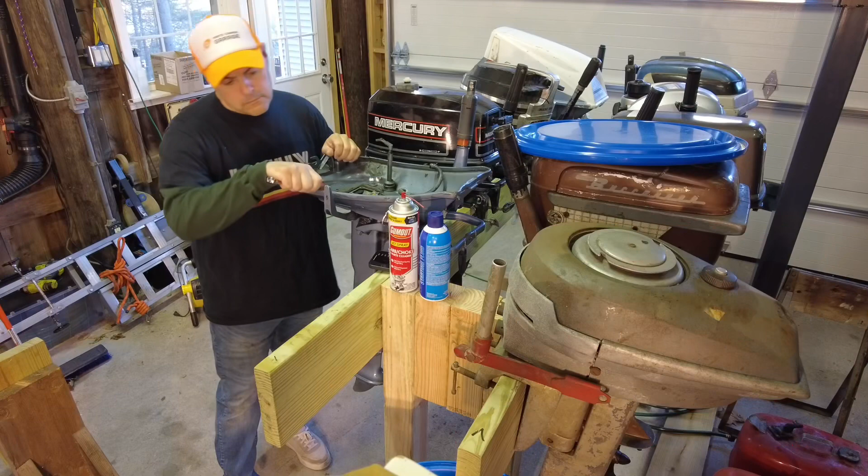What the heck could this be? Hello, Parts Cannon Garage. You're on speakerphone because I have a wrench in my hand. Yes, yes. This is Claude Berkshire Huffingtonson the Third. Okay there. Hi, Claude. Yes, yes. Let's dispense with the pleasantries, shall we? My son, Charles Benedict, told me you were selling a Longshaft outboard motor. Is that true? Not really. I'm just some dude in a barn. Not a real business. How did your son find out about this?

I rarely listen to the child, to be honest. Let's cut to the chase. This Longshaft you're selling would be perfect for the new sailing yacht. Well, I don't even know if it works yet, but it's sitting right next to me here. Hopefully if I get it running, I'll give you a call. How does 10,000 sound? $10,000? Perhaps it's running now? It's still not running, no. But no, oh, well, okay, Claude, for $10,000, I can have it ready by tomorrow. Splendid! Well, I must really get back to the yacht club. I say good day to you.

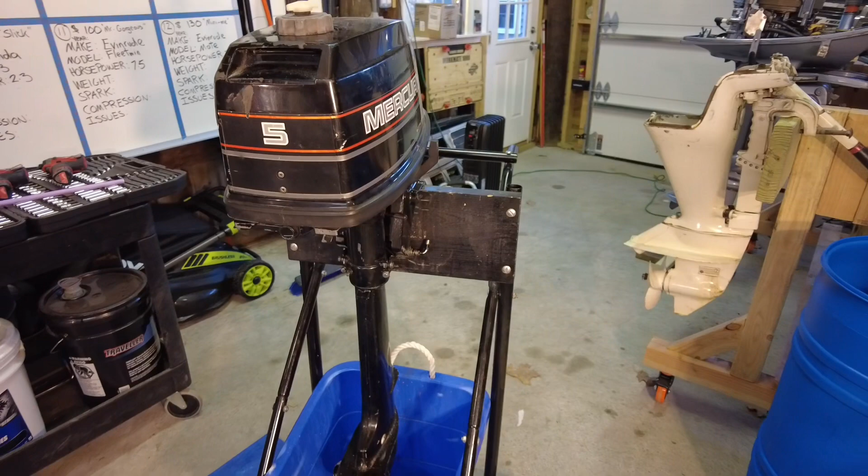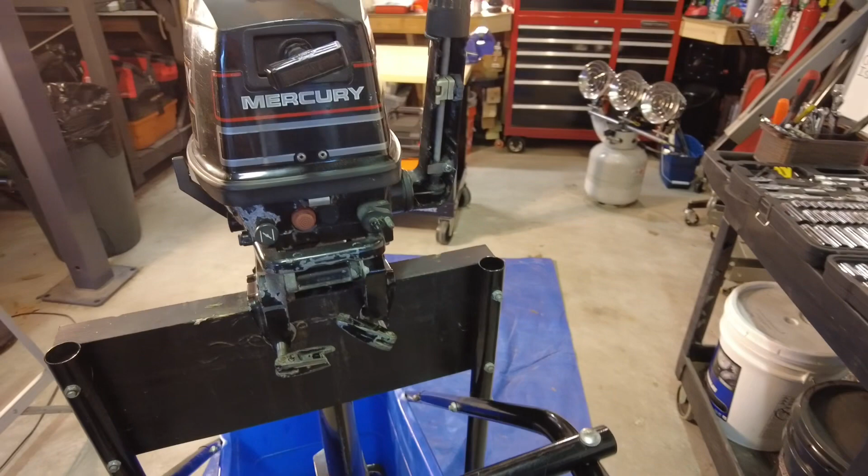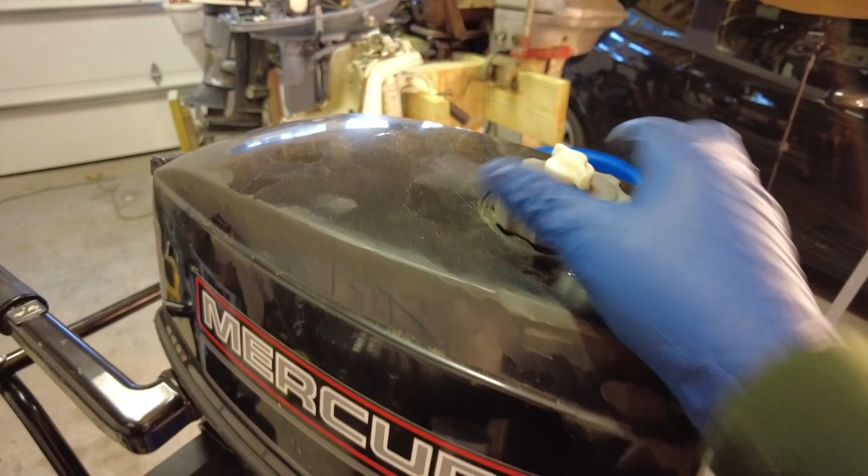And here we go on step 1 of our 8-step process. Step 1 is inspect. So we take a quick look around, see if there's anything broken or missing. Make some general comments on the condition possibly, or at least observations. Looks pretty good. I don't see anything missing. I think this is relatively new. Now in this one I do have one piece of information. I was told that for some reason the onboard gas tank, which is a great feature, does not work. It only will run, or it last ran 5 to 7 years ago, using the external tank only.

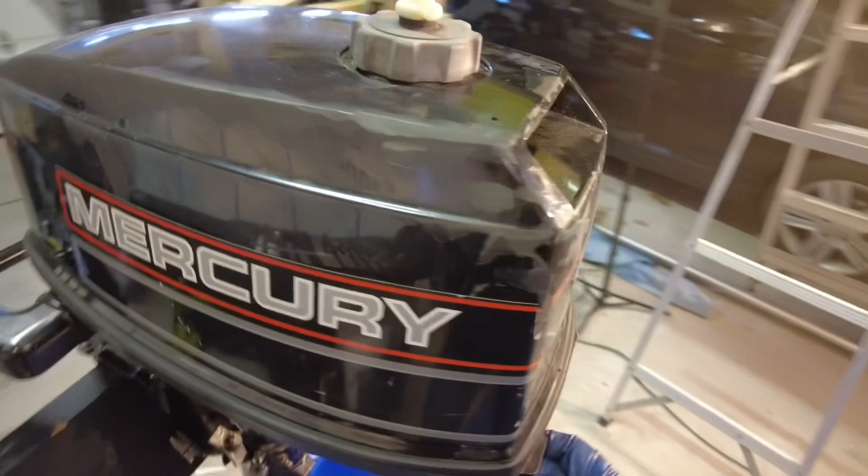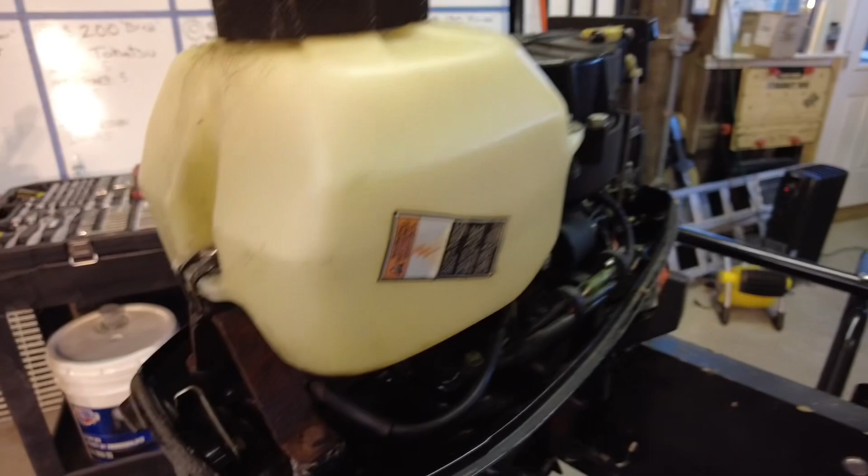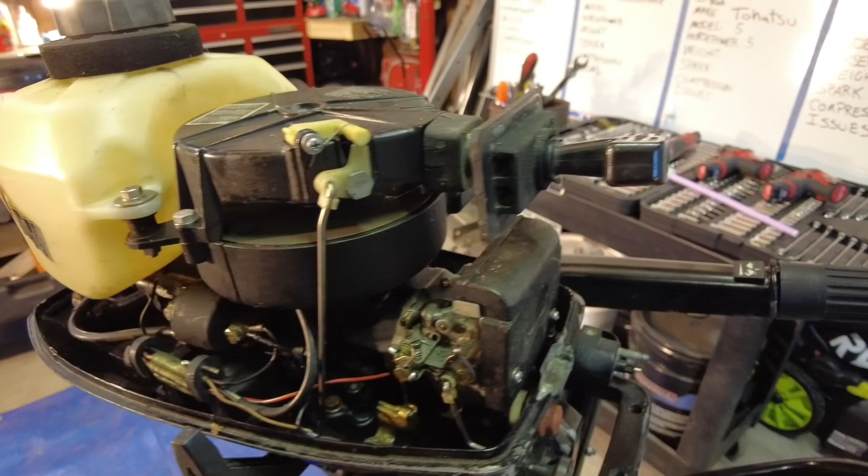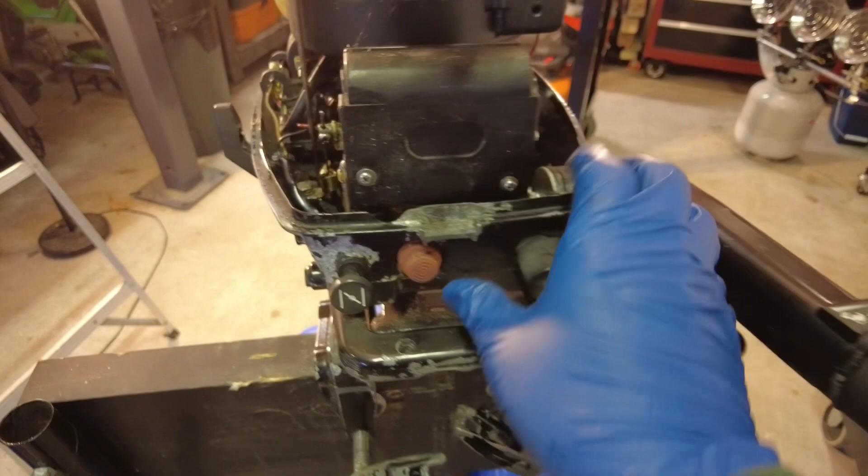So let's take the top off. Looks pretty good. Okay, there's the tank. Certainly looks different from the other outboards we opened. There's the plug. Oh, this is a single cylinder rather than the twins we've been working on. Something new. Pretty straightforward here. Here's your choke. Feels pretty smooth. Kill switch, which is like pressing on a rock. I don't know about that one.

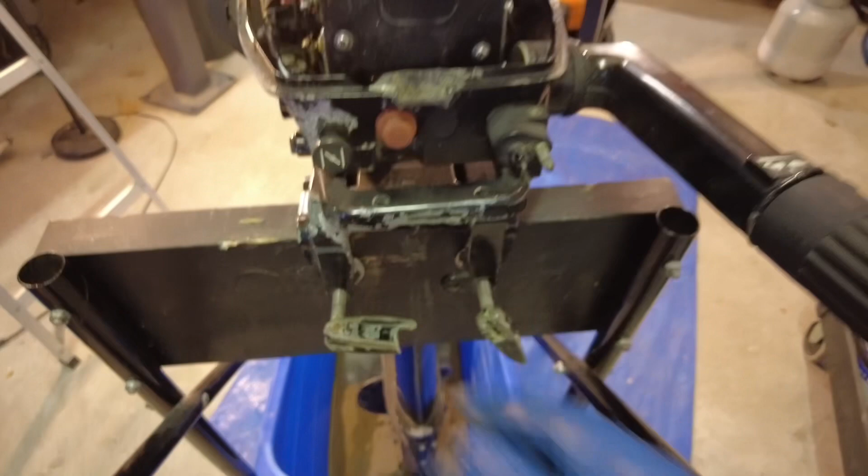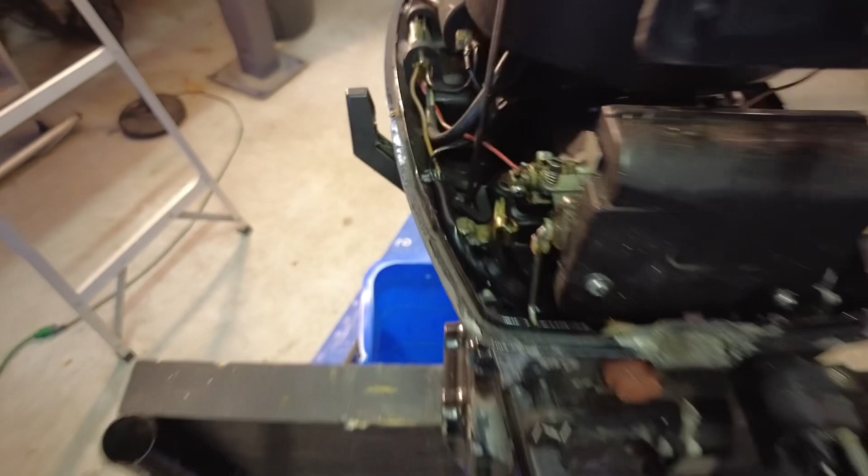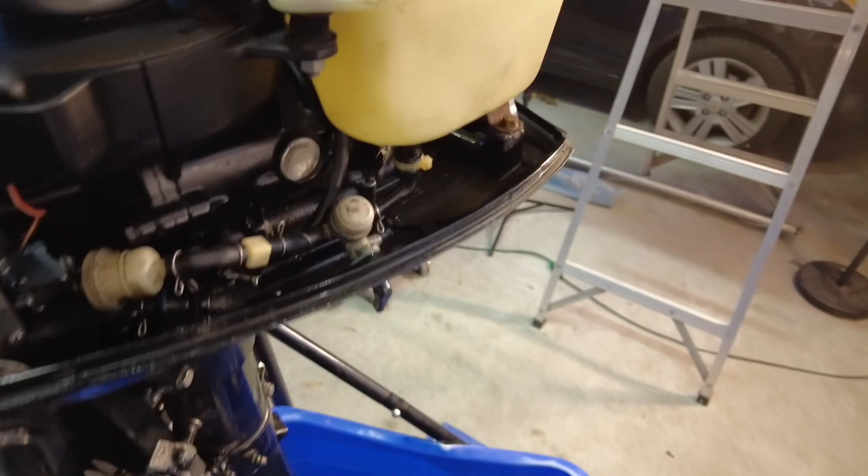This looks okay. Clamps look okay. This one looks like it's missing a little piece, but no big deal. Let's try the throttle. Feels very smooth. Almost too smooth. It is working. Okay. Now this is interesting. I'm going to spin this around so we can get it in the light here a little bit. The amount of plumbing with this extra tank is pretty impressive.

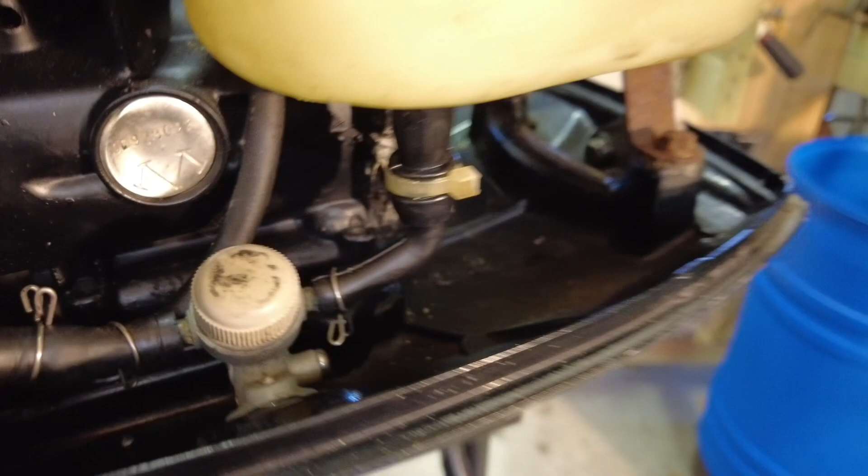So here's the, oh, I can use my new finger. Got this at Dollar Tree. I love it.

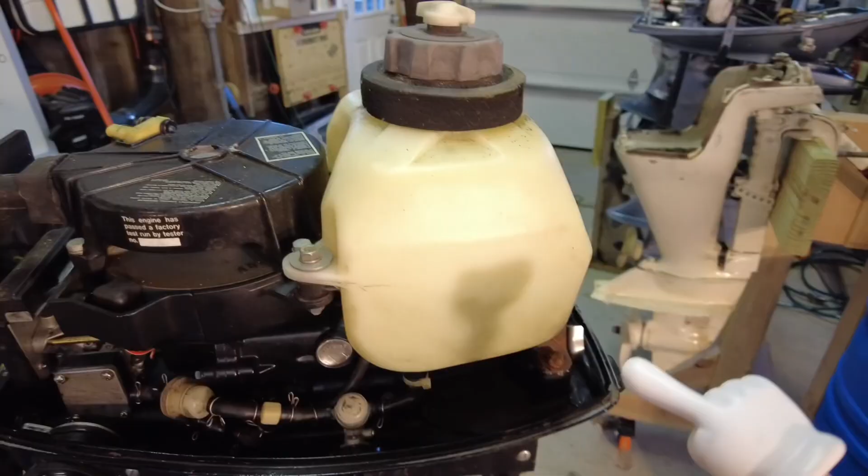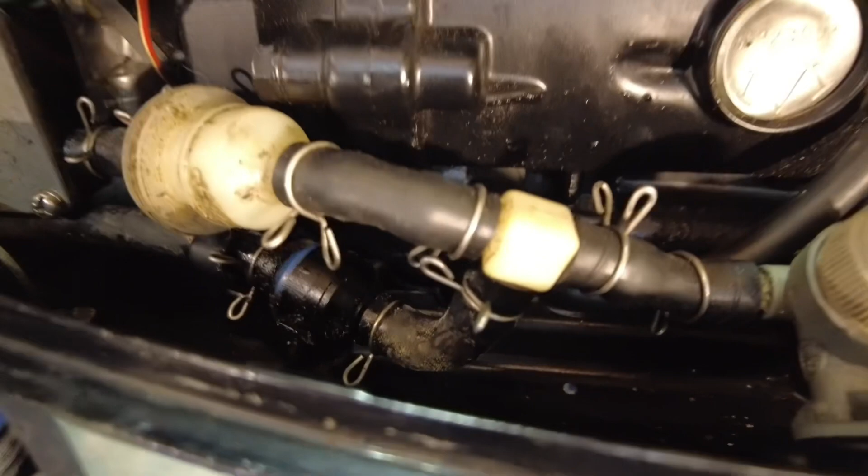Okay, tour of the plumbing. Some early diagnosis on the problem. This is the internal tank. Over here, we have the external connector. The bottom of the internal tank, see the gas line coming out, goes over this way to a valve, keeps going over. Then there's a 3-way connection here, where you can see the external feed coming in, and it comes up into this little white box looking thing here. That's where the other tank feeds into. And it goes over here through this fuel filter and then into the carb.

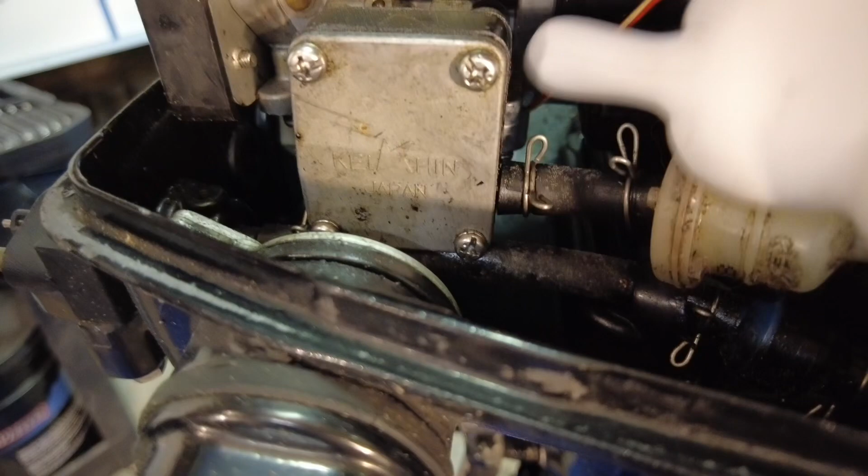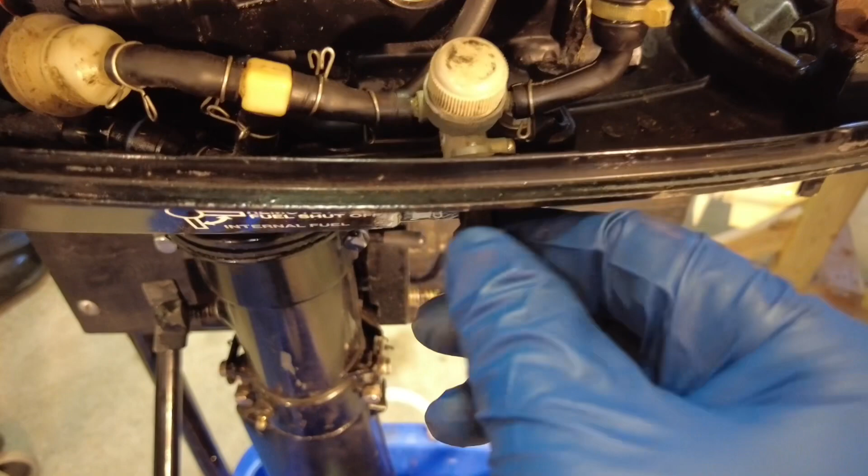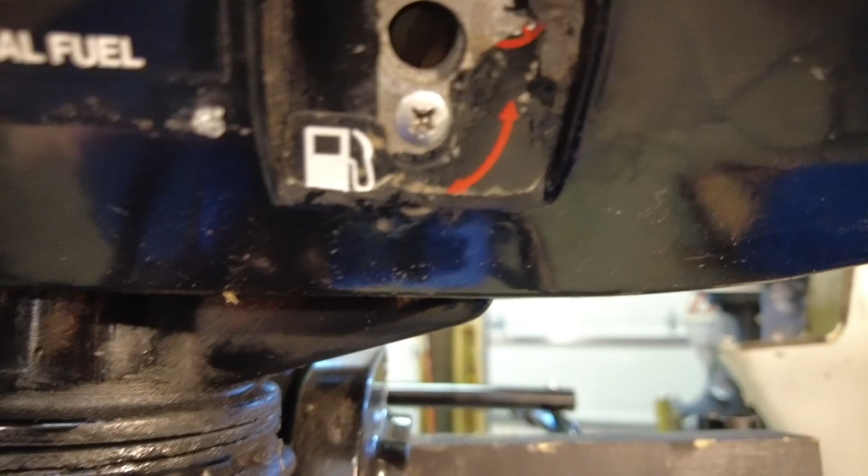So pretty straightforward. And my guess right now is that this valve is broken because it turns all the way around freely. It feels like it's doing nothing, and it feels like if I wiggled this enough, this handle would just come right off. So I have a feeling that, oh, and there you go. So I don't know if this isn't moving anything inside there, or if it's just, see if we can take a look inside. Okay, interesting. Not sure what to make of that. So we'll get back to that.

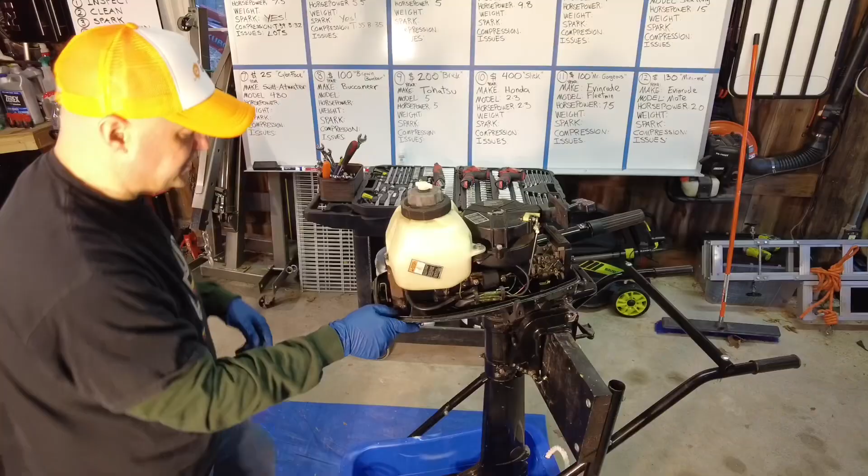Step 2. This motor looks very clean, but we're going to give it a quick wash anyway. What we do.

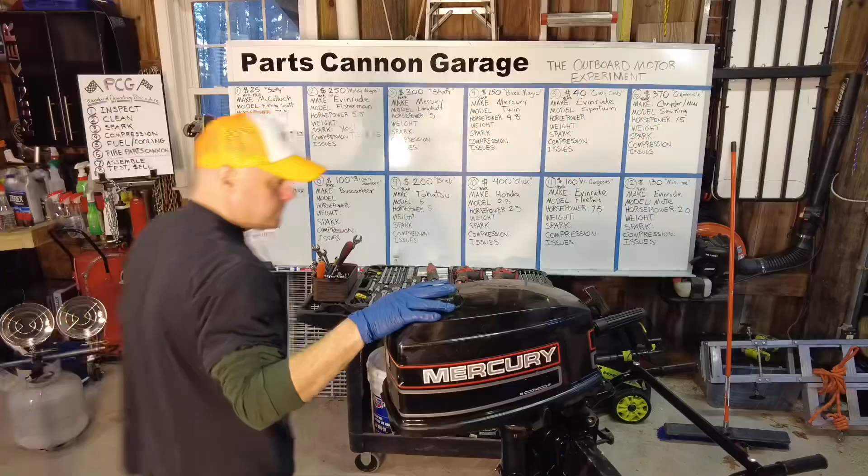No gratuitous before and after photos on this one because honestly they look exactly the same. I think I removed one spider web and maybe one smudge of grease up here. So I think that's a good sign. It does smell nice though. We have the best smelling outboards in town, Parts Cannon Garage.

We have successfully completed step 1 and 2, inspecting and cleaning. We're now on to 3, which is checking for spark. And on every other motor, I've pulled off the starter, ripcord, if you will, and I'm going to try that again on this. I really like to cheat and spin the flywheel with the drill, so let's get that off.

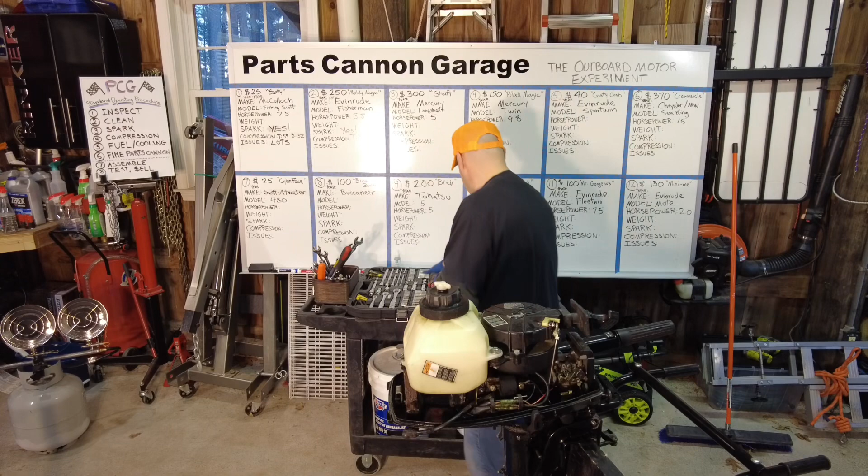So when I went down to Family Dollar to get some ice cube trays, actually, they were out of trays, so now I'm using fancy deviled egg trays to hold all the nuts and bolts. It works. It adds a little class to the garage as well. Quite lovely.

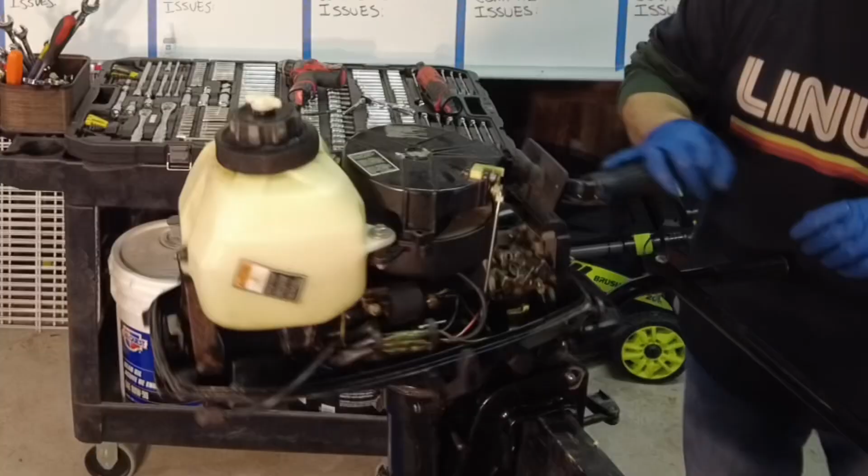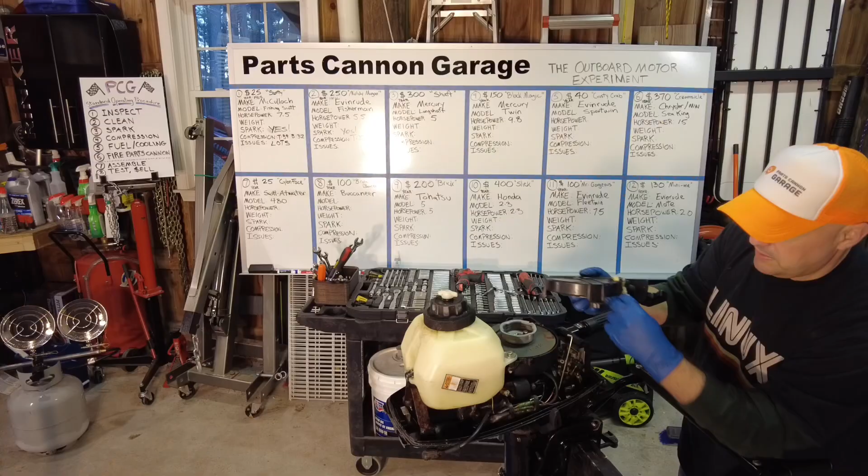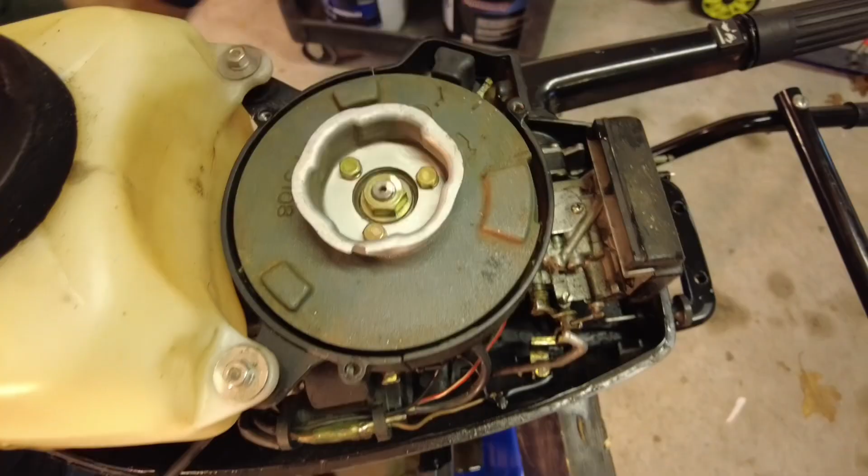All right, this does have some linkage. And this thing only allows you to start it when it's in neutral. Pop that out. There we go. Okay, and there is a nut up there. Take a look at that if you like. So we're going to put our socket on there and spin it. Yes, 3/4 looks good.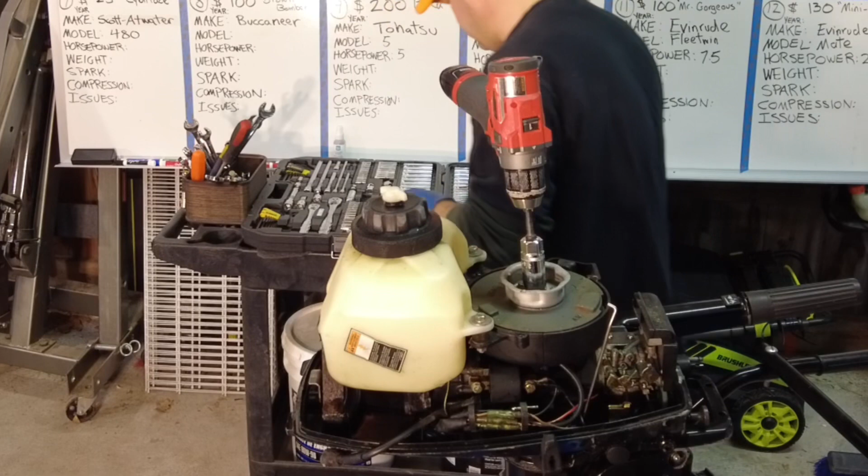Okay, we need to pull that plug out, which again is probably a 13/16. Here it is. I need an extension because it's under that tank. That might work. There we go. Okay, here's our spark plug. Taking a look at it. I mean, it pretty much looks brand new.

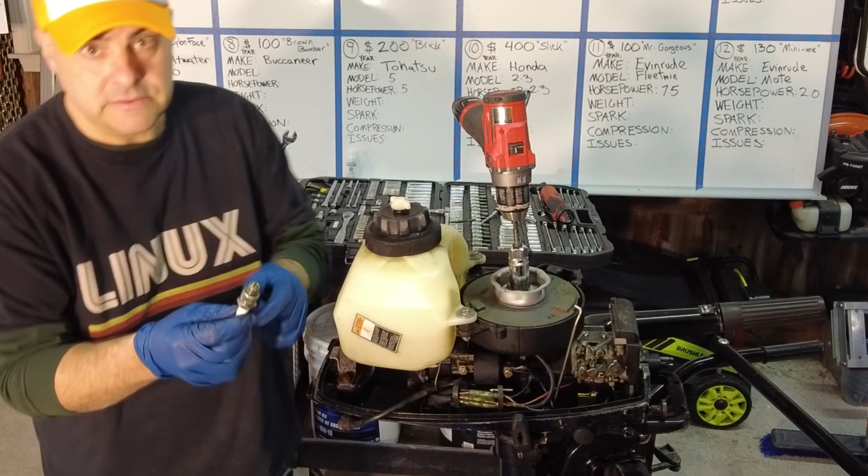It's a good sign. A lot of these kicker or long shaft motors, they sit on the back of sailboats forever, and they're hardly ever used. You never know, though. You think I know what I'm talking about? Well, you know. So here's the plug. Let me try it, and then I'll pull you in, see what happens.

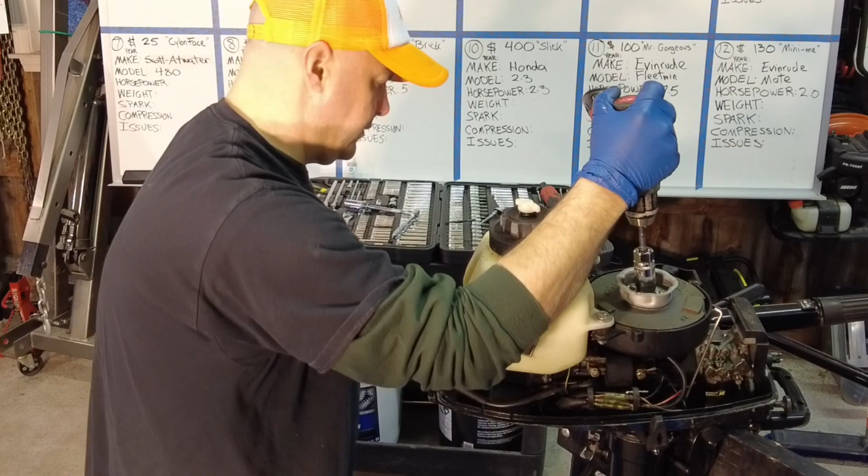Angle this over. Because this thing tends to want to rotate. Probably a tensioner somewhere. Here it is. Makes it rotate a little less freely. Okay. All right, spark looks really good on this one.

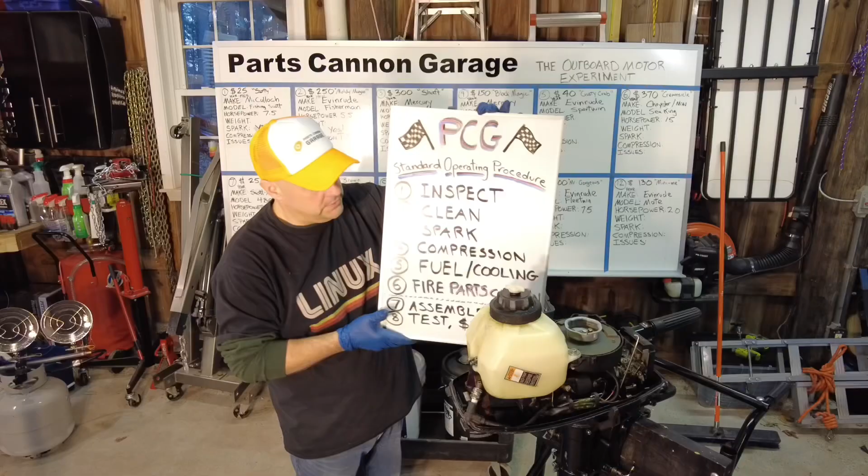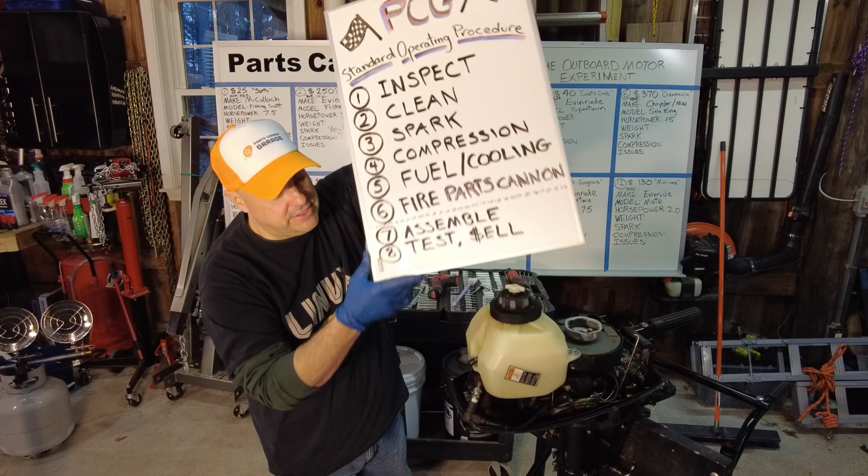We are on to step 4, checking for compression. Pretty happy about that spark. That's a nice surprise. Let's see what this thing will do. And we're also going to be seeing our new digital compression tester. And I can't wait to try that on the other motors and see if those low readings in the previous videos were correct. But let's give this one a shot.

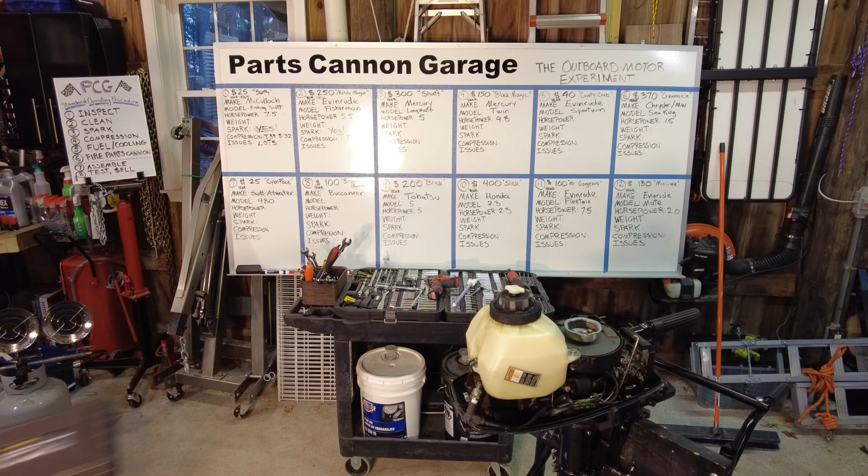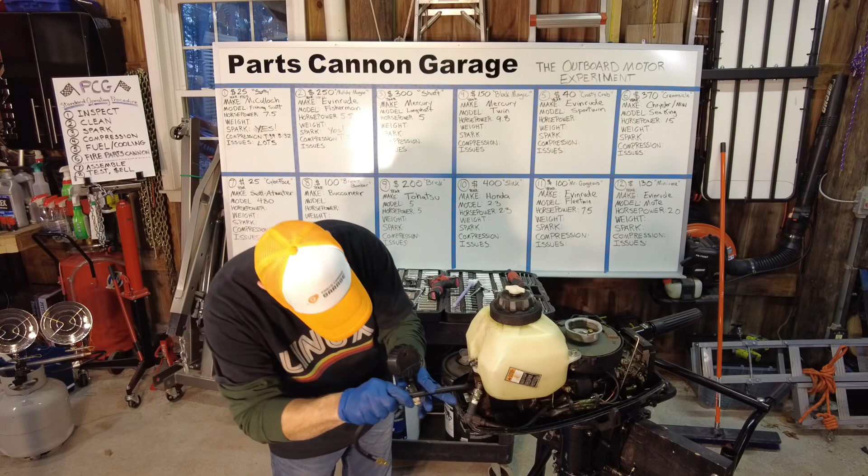All right, so we are using the Azuko cylinder compression tester kit. Let's see. Basically the same thing as the other tester, except a digital gauge. Still 2-piece, which is nice, makes it a lot easier to screw in. You don't have to spin this valve around in your hand a bunch of times. This one's a little tricky because it's way under here, but okay.

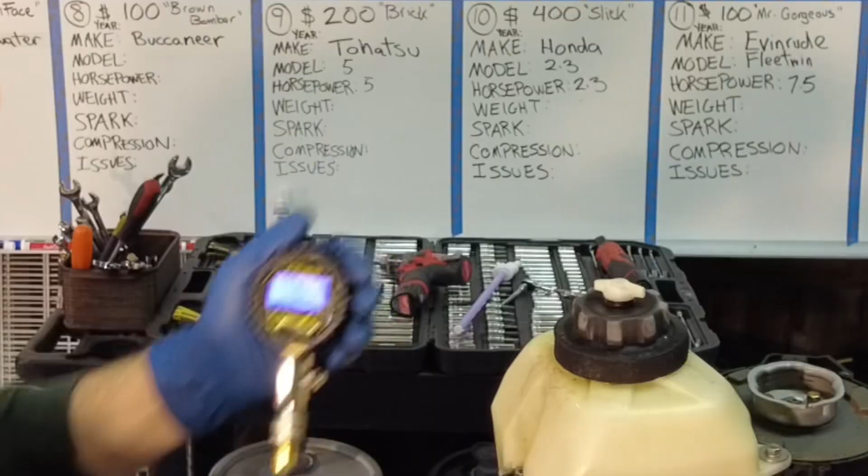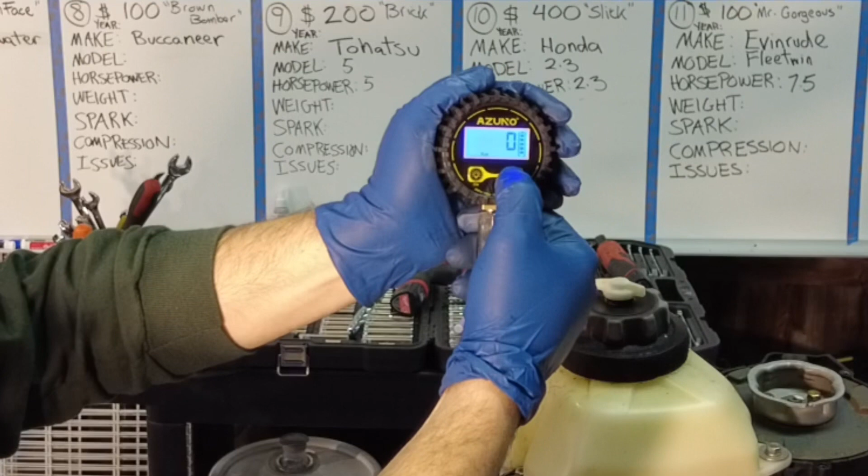There it is. She's a beauty. You have on-off. I'm pretty excited that it's backlit, and you have units. It's in PSI, and it can go to kilopascals, and there's a battery meter on the right. Azuko, measuring tomorrow's outboards. Right here. This is so exciting because I don't know what it says. What does it say?

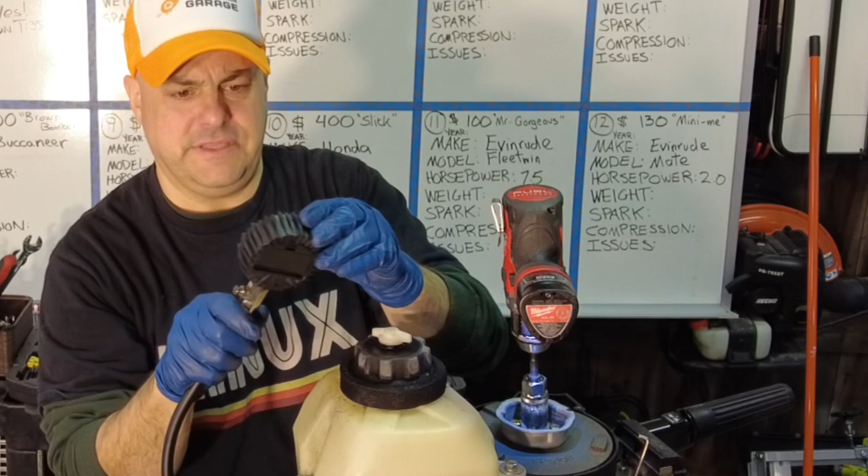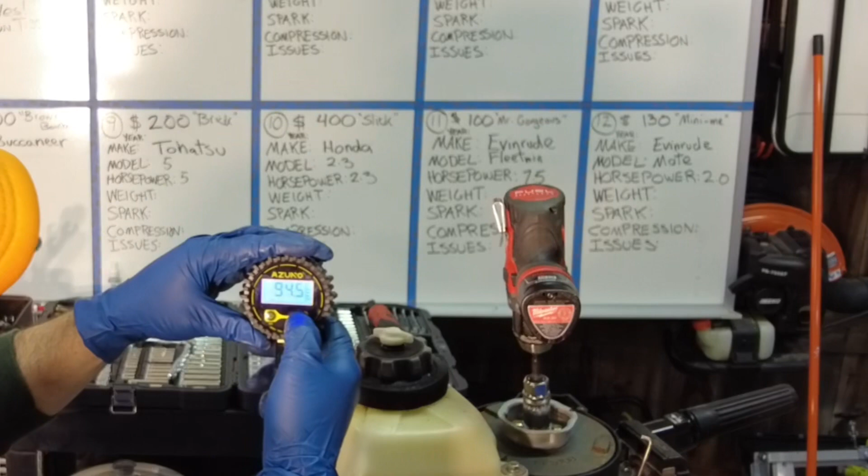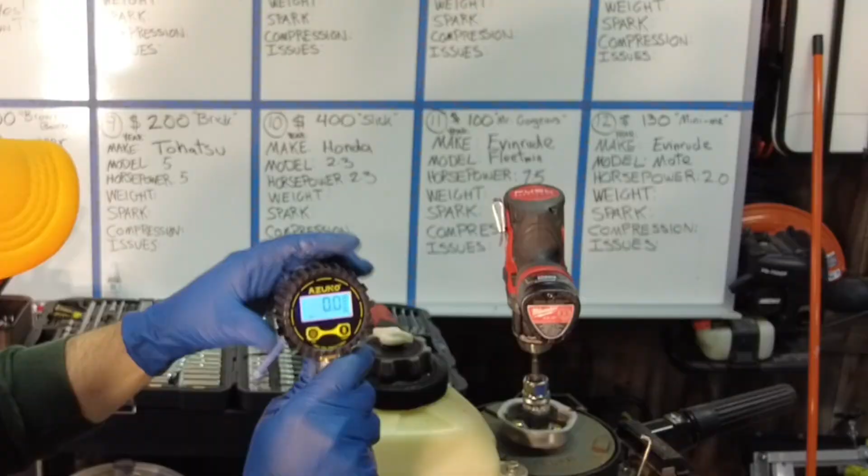6.5 bar? No, apparently there's another unit. And another one. So we have PSI. Whoa, 94.5. Oh, it's converting. That's wonderful. 94. Ooh, that was a good sound. All right, let's try it again. PSI from the start. Hopefully you can see that. Whoa.

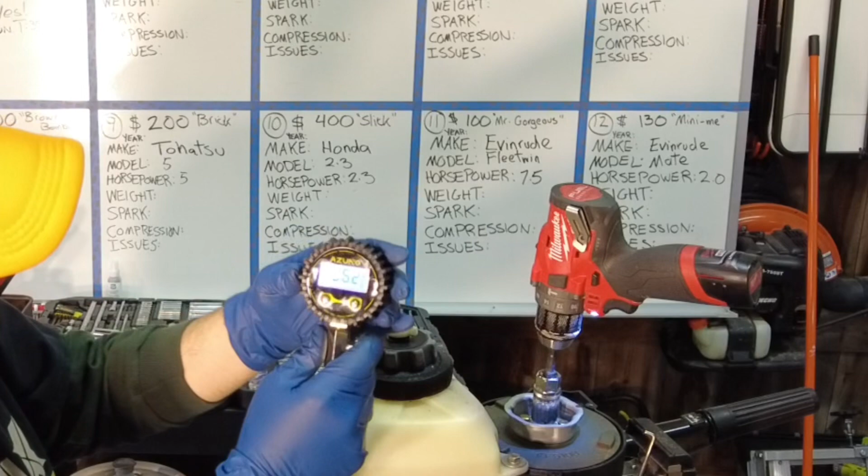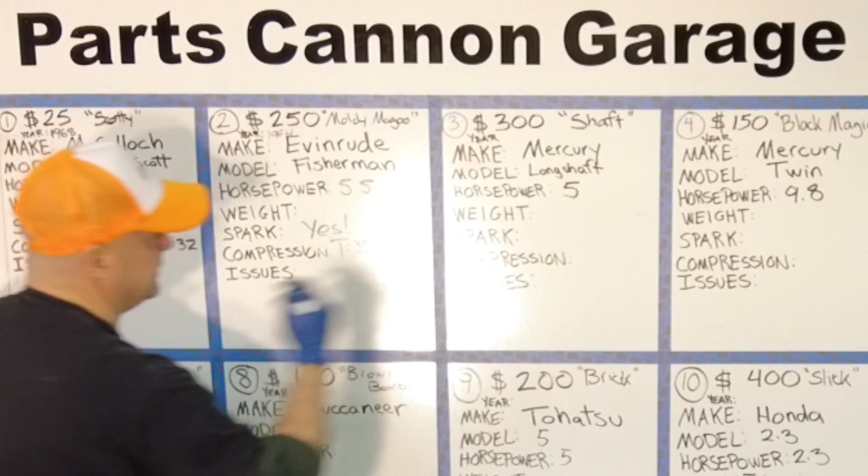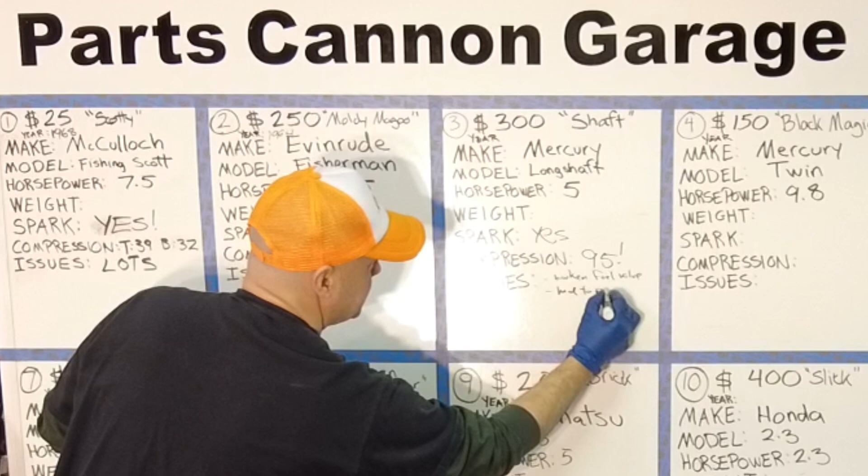96.2. Wow. Okay. We're going to call that 95-ish. And we're going to write that on the board. I'm very excited, if you can't tell. Spark. Yes. Compression 95. Issues. Probably should write a couple here. Broken fuel valve. Hard to press stop button.

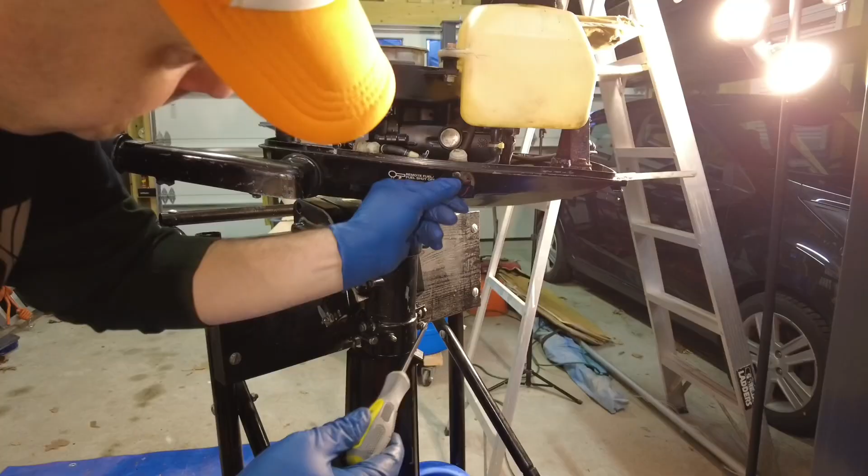What do we do first here? Do I actually try to attempt to fix this? Or do we go with an external? I really like the internal. How does this come off? Let's pop it off. What the heck? Here's the valve I've been talking about. The handle just comes right off. It looks like there's supposed to be maybe a slot. I don't know. Let's take it off and see what we're dealing with. Leave the handle off for now.

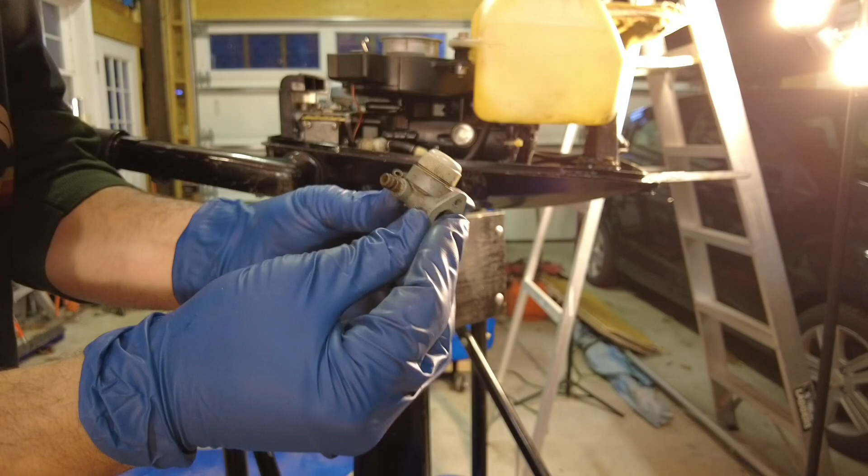2 Phillips screws. So what I'm going to do is just pull off those hose clamps and take the valve out, and we'll take a look at it. Okay. That was pretty easy. That's what it looks like. If you can see that, when the valve is vertical, in only one direction, it is open.

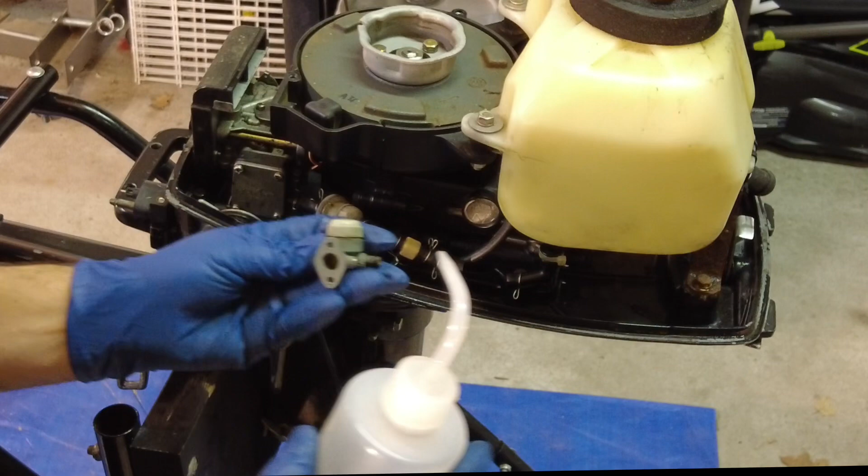This bottle happens to fit perfectly in one side, so we'll use this bottle to simulate the tank. Just jam that in there. Good enough. Hold it over the disgusting bucket, and let's see if anything comes out of the other side. Hold this in front of here. Okay. Nothing. I can't even squeeze the bottle.

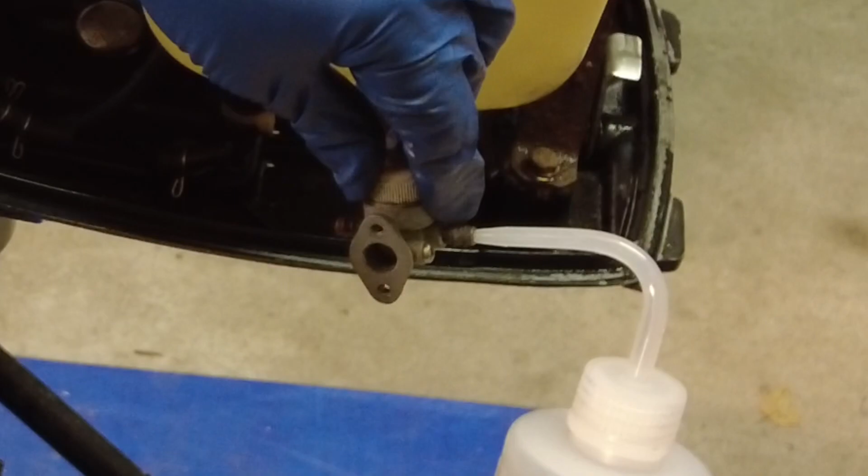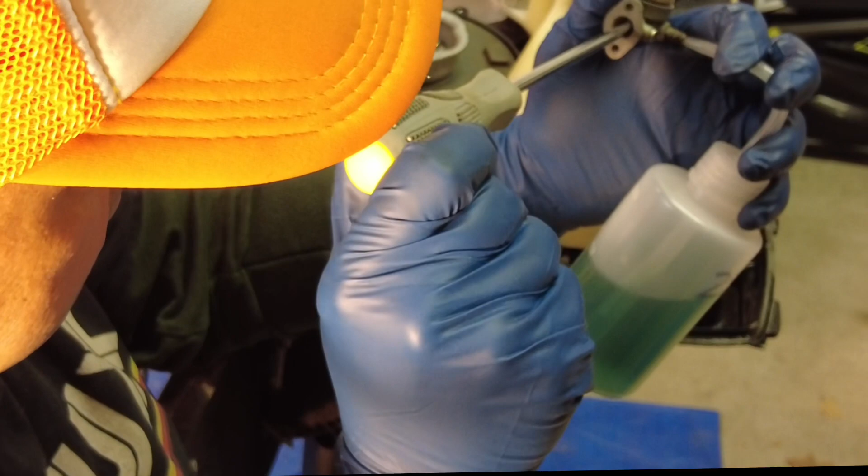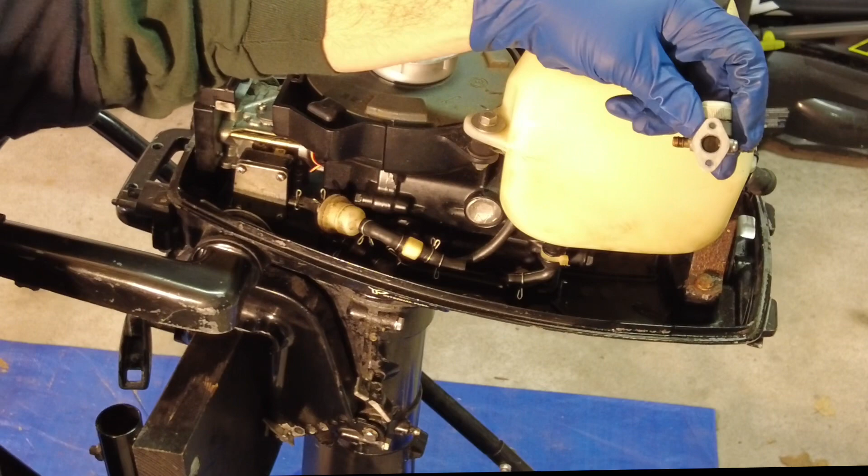Now let's rotate that slot 180 degrees. Okay. Now let's see what happens. Oh, wonderful. Look at that. Flowing really freely. Great. So, I guess you really don't need that lever. Set that back to off.

At this point, we're going to assume that the fuel system is fixed, although you need a screwdriver, but big deal. And we're going to put this into the barrel and see what happens. Now this is the long shaft. I mean, it's incredibly long. It's almost touching the sludge down there. So this should be good. Let's get going. Time to put the pull starter back on.

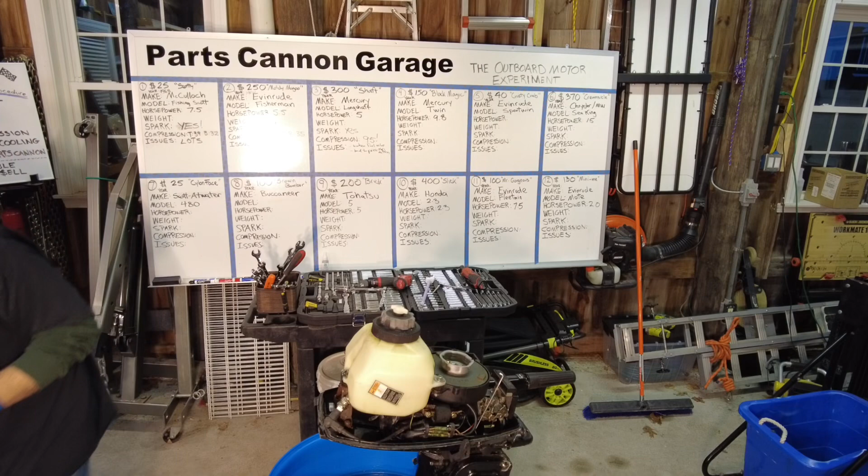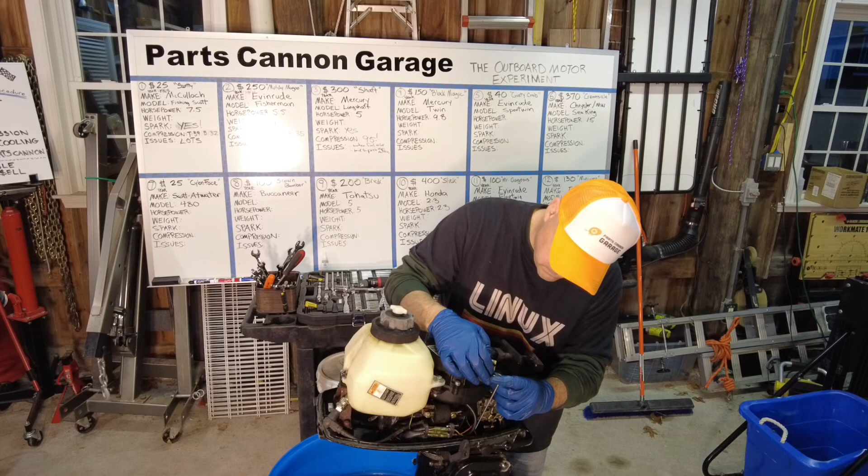Today I'll be using a little bit of True Fuel, the fuel when you want to pay 10 times the price of regular gasoline plus 2-stroke. It's outrageously expensive, but it's nice if you're lazy. It's 40-to-1 premix. I think that should be enough to prove the point.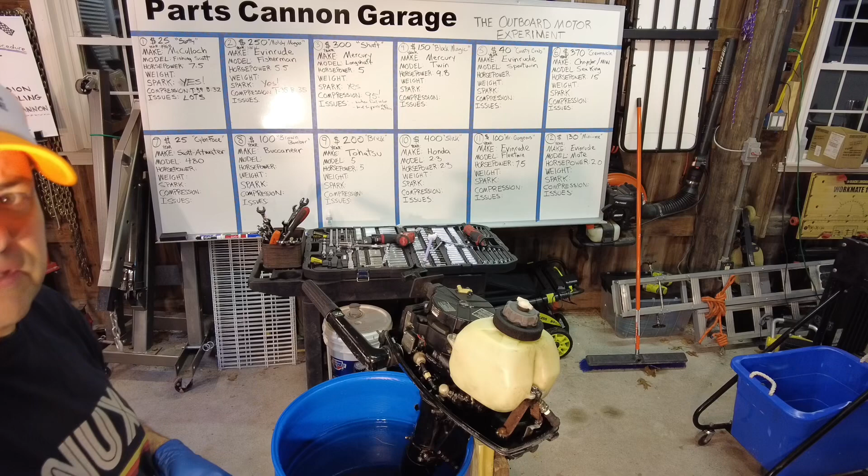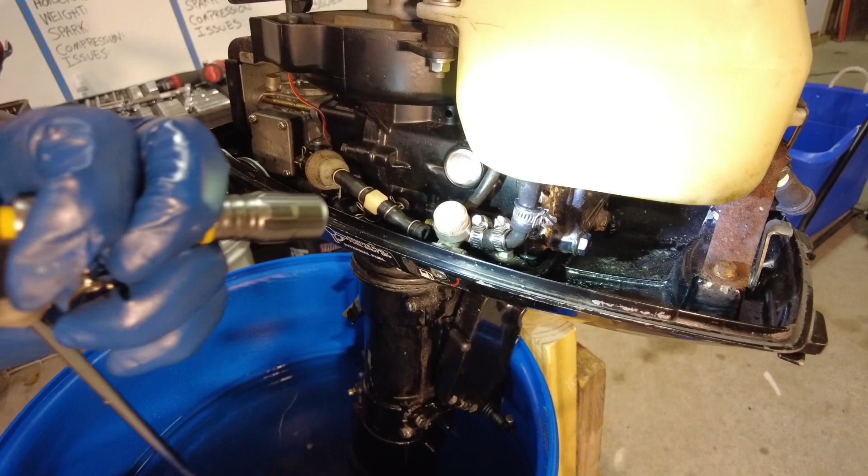So 20 minutes and 3 stainless steel hose clamps later, we have stopped the leak. And that's what it looks like now. Before it was 3, there was a zip tie on the top and 2 little paperclip looking things. And now it is 3 marine grade stainless steel clamps. And it does not look to be leaking.

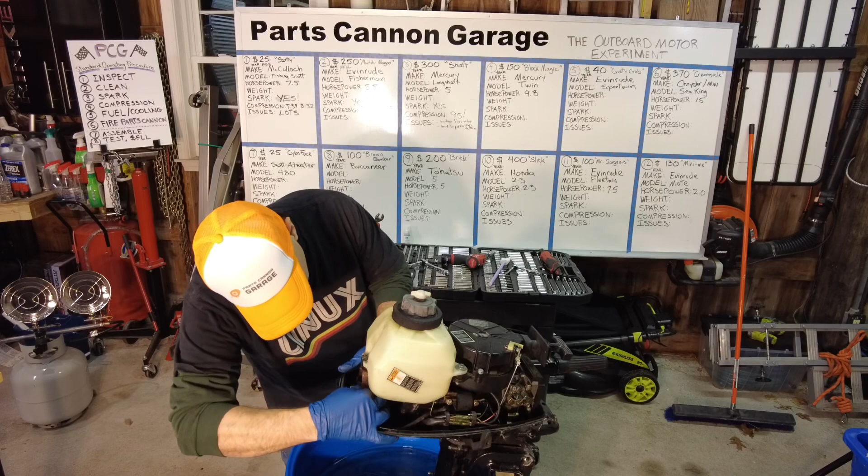Okay, the plug's back in. It's not leaking fuel. The case is filled with fuel, so we have the fire extinguisher. Let's give it a rip. Choke is on full. The handle is in like the middle position, we'll call it. There's just a rabbit and a turtle on the handle, no indication of where to start like some of the other motors. Okay, let's see what happens.

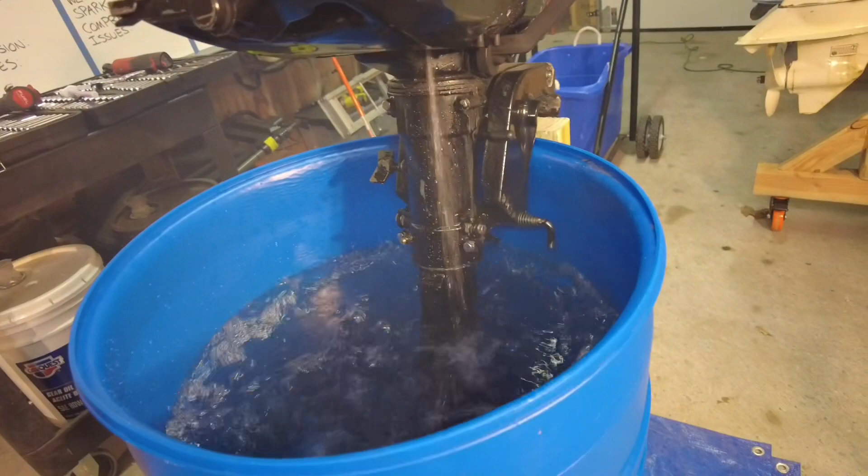Holy smokes. Did anyone hear that? We have smoke in the room. I'm going to go to a half choke. You gotta be kidding me. Oh my God. Turning the choke off. And it's shooting water out, so we're checking for water. Holy crap. This thing runs fantastic. Wow, it's not even warmed up.

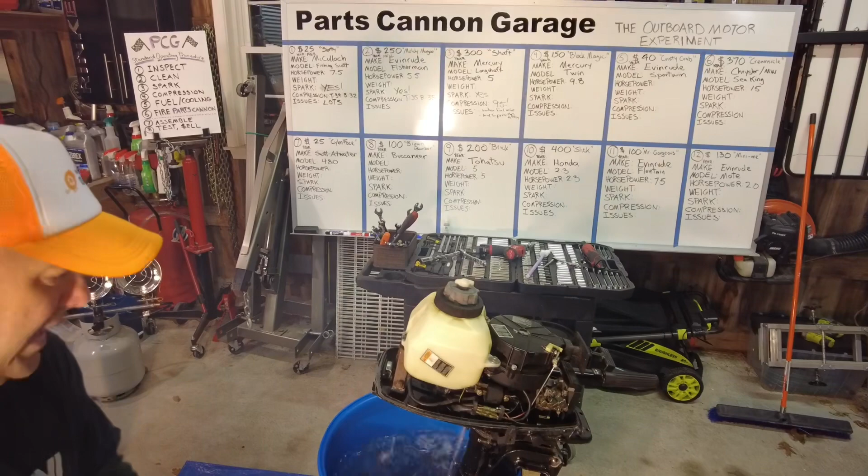Okay, yeah, now for that kill switch. Let's see if it idles. Can everyone see this? We have a running, idling engine for the first time in Parts Cannon Garage history. Our history is only about 3 weeks old, but still. And the kill switch actually works.

Okay, my eyes are burning. Is that normal? Let's try it one more time. Wow, the kill switch is wonderful. It's like touching a phone screen. It's so sensitive. Well, we have a runner. I can barely breathe and see in here, so I'm going to open the garage door and we'll do a summary in a minute.

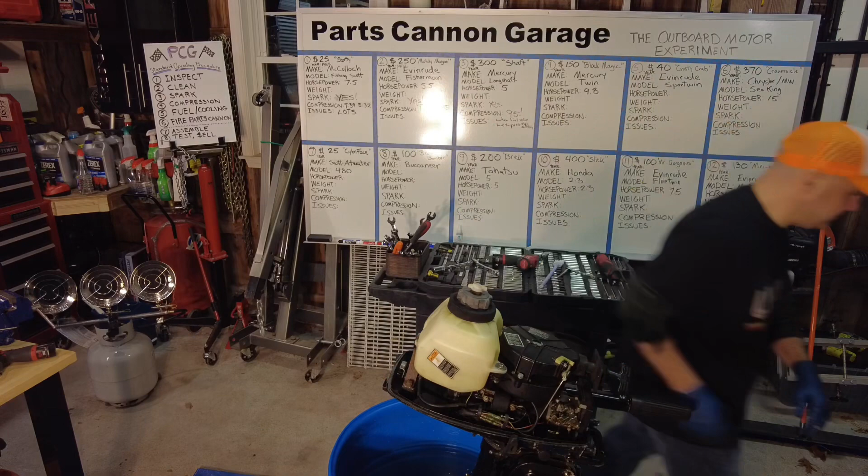That just about wraps up this episode of Parts Cannon Garage. We have our first successful motor. I'm still working on acquiring an aluminum boat so that we can put this in the water and test it, but this one seems like a beauty. The only thing that I will look into is this tiny little black plastic lever, which looks like it's worth about 25 cents. And otherwise you can use a screwdriver to just give a half turn to that valve. But I will try to find this to make this complete.